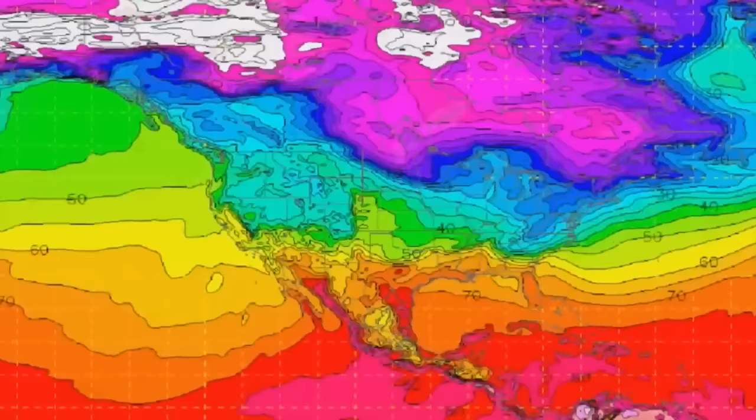In the real world, the answer to the question of can we see into the future has been answered with a resounding no. In our ever-evolving society, the trend today is to look toward the future by relying on predictive modeling to best predict the probability of an outcome. But we all know that even these well-thought-out predictions based on data often turn out to be not so predictable. Although it's clear that future events remain virtually unknowable, there is one group within NASA that comes as close as you can to seeing into the future.

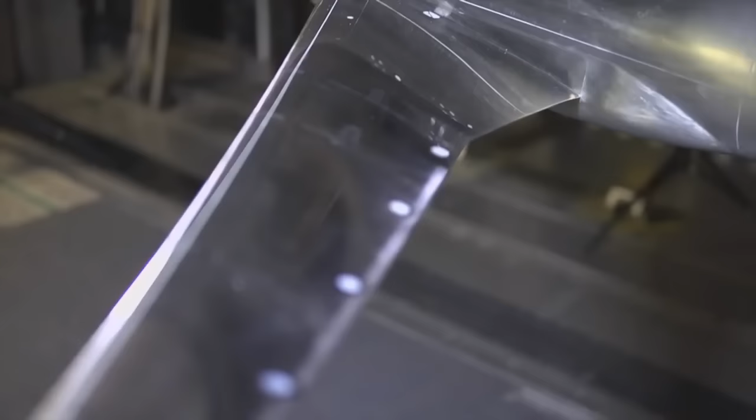Throughout NASA's field centers, members of the Fixed Wing Project team are peering into the future every day and coming up with concepts that they believe will be on the next generation of aircraft. Because it takes years to plan and develop these concepts, the hardware and theories that are being tested today will be key components that enable the next generation of aircraft to take flight.

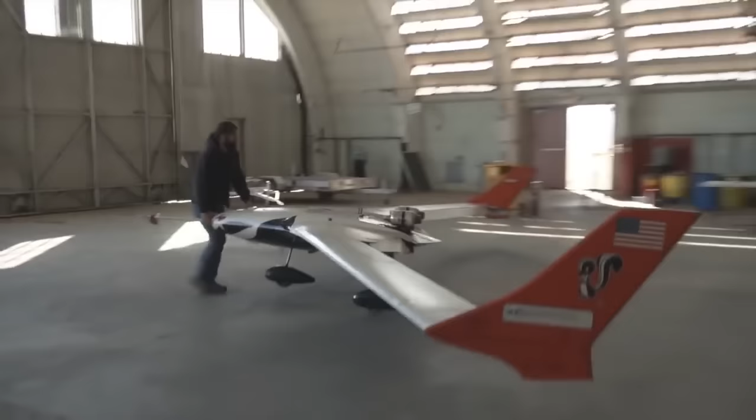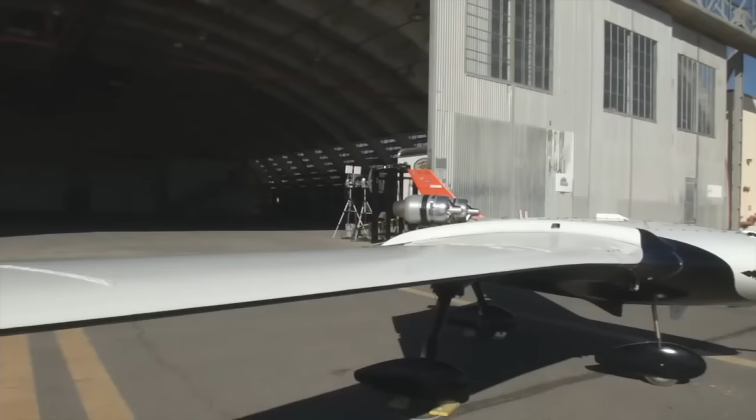On this episode of NASA X, follow us around the country as we visit members of the Fundamental Aeronautics Program's Fixed Wing Project, who are developing the framework that will shape how aircraft of the future will fly. Take a look behind the gates of NASA to see what some of these new ideas look like and how the engineers of NASA are paving the way for the ideas that will change the future of flight.

To the untrained eye, most of the aircraft of today look very similar. This is because over the past century of flight, aeronautical engineers have worked hard to optimize passenger aircraft to the point where they are as efficient and safe as possible. As a result, the basic tube and wing shape has been configured and examined from every possible angle, making it the most efficient design possible today.

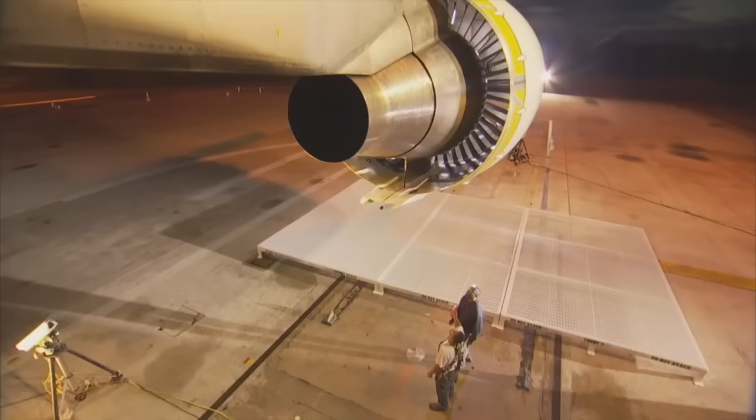Although aircraft have looked basically the same over the past few decades, if you look closely, you can see some of the major design changes. Wings that were once swept back more dramatically now are less so because of advances in aerodynamic shaping. Engines that spewed emissions by the ton are now much more efficient. Materials that were once so heavy that they significantly weighed down a craft are now much lighter and stronger.

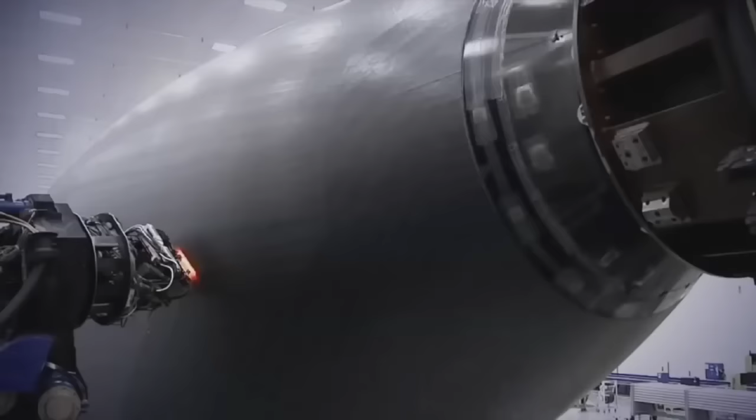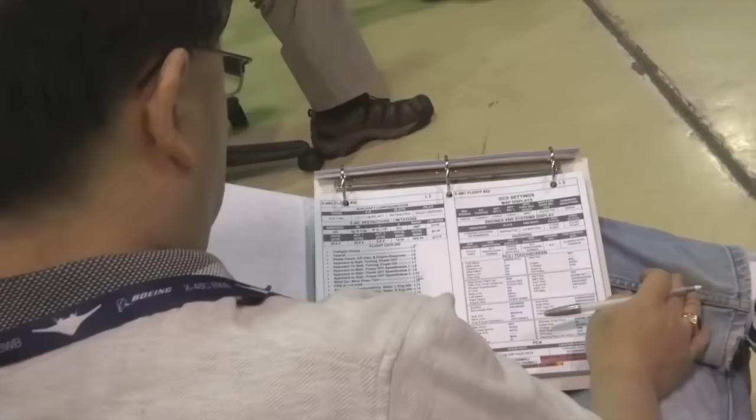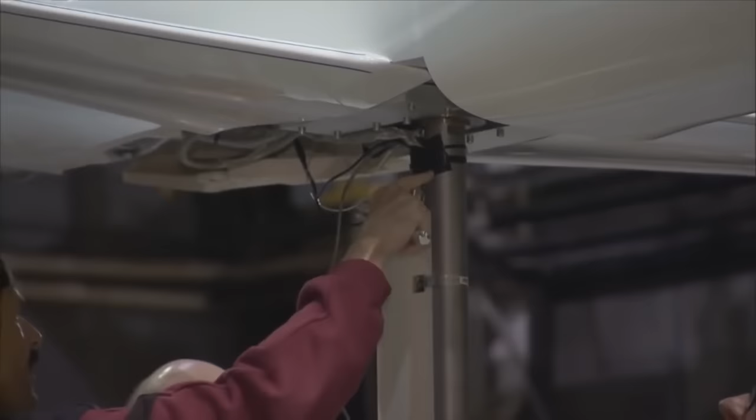With all this improvement and efficiency, it is fair to ask if there is anything else that can be done to make flight even better. The answer is of course yes. Behind the gates of NASA, there are scores of researchers who know that we can still make aircraft better because they are working toward these long-term goals every day. Some of these researchers from the Fixed Wing Project are working on so-called N+3 configurations and goals.

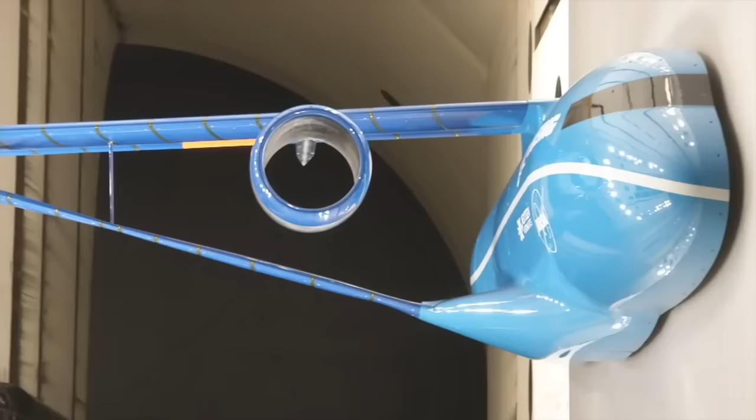In mathematical terms, the letter N is where you start now. N+1 is the next step. N+2 is just beyond that, and so on. Here in the Fixed Wing Project, N+3 equates to aircraft that will be flying in around the 2030-2035 timeframe. For this team, everything is on the table, including engines, fuels, wings, and fuselage shapes.

Well, we need to remember the first A in NASA is aeronautics. So it's a National Aeronautics and Space Administration. Aeronautics is the field of research for airplanes. The airplanes that fly today were researched and experimented with within NASA many years ago. So we're trying to continue that tradition, that important work that we have done for the nation and the world, for 20, 30 years from now.

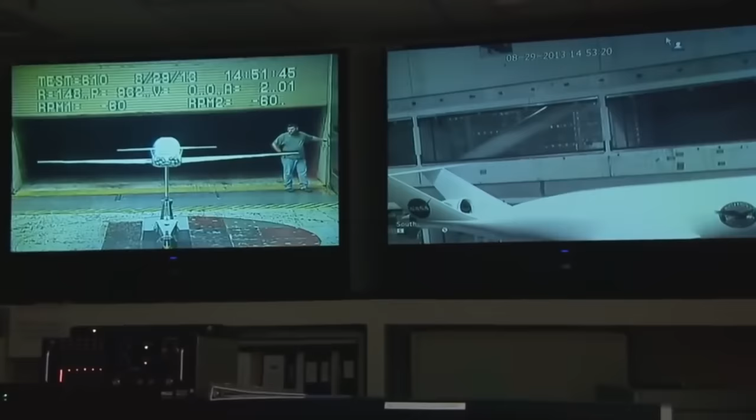Fixed Wing is a NASA research program in which we are doing activities to try to improve the airplanes that we're going to be flying in the future. We're trying to make them less noisy. We're trying to make them better for the environment. We're trying to make them in a fashion that they will use less fuel.

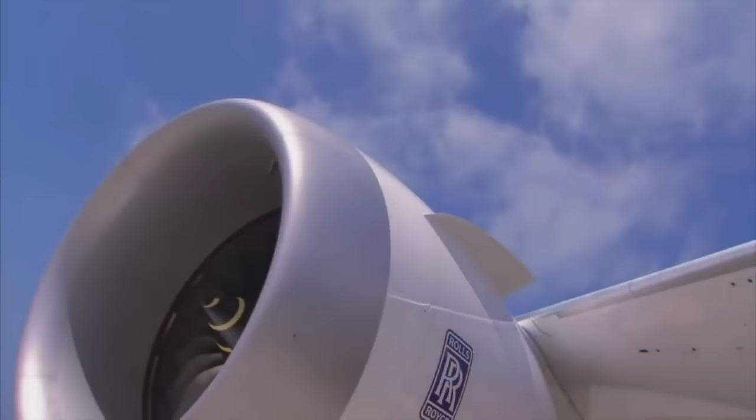The research we're doing is important because air travel is such an important part of your life. People travel, even if you don't travel. Cargo gets carried every single day. You use something every single day that gets carried by an aircraft. It's part of our way of life these days, and it often gets taken for granted. There are challenges though, so we are focused on exploring and developing technologies and concepts to improve the energy efficiency and environmental compatibility of transport aircraft.

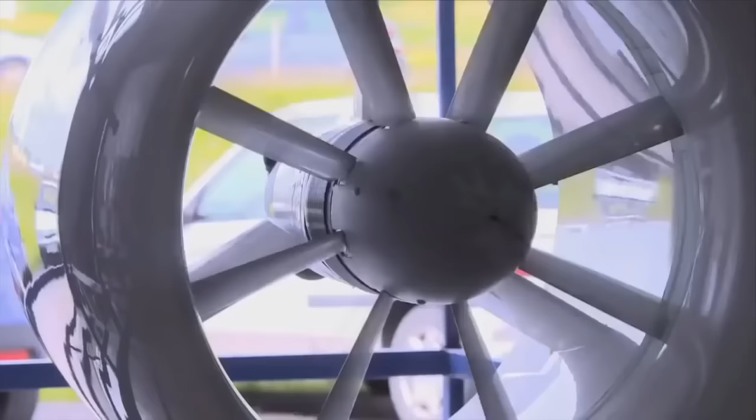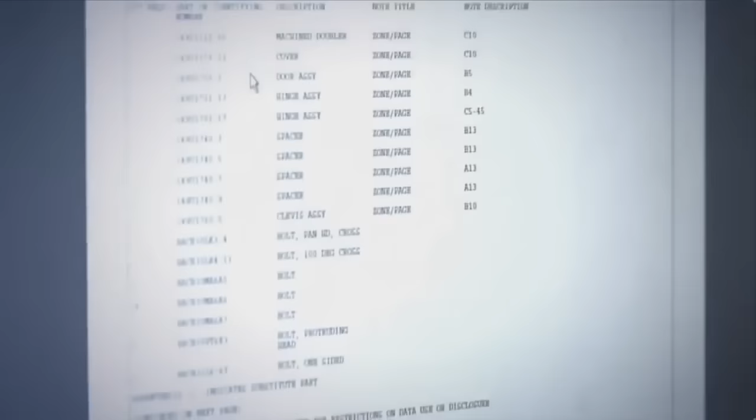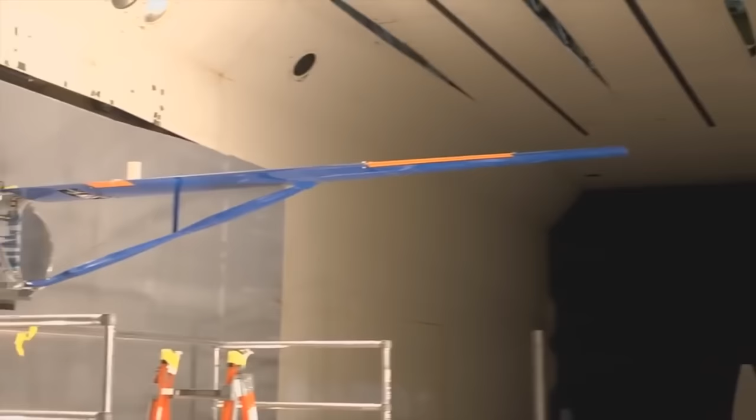With this mandate to significantly lower noise and emissions and increase performance for subsonic aircraft, there will be a need to address virtually every aspect of the current aircraft configuration, including developing new materials and engines, testing alternative fuels, and even changing the fundamental shape of the aircraft. All across the country, fixed-wing researchers are doing just that. Major advancements are being made into the understanding of how future aircraft will fly. Because there are so many areas of study, let's first look at something that has the potential to be used today as well as in the 2030 timeframe: alternative fuels.

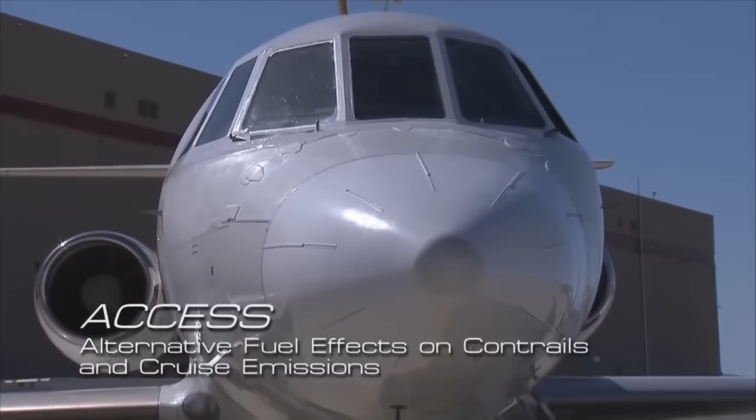On this beautiful morning at NASA Dryden in California's high desert, a test called ACCESS, or the Alternative Fuel Effects on Contrails and Cruise Emissions test, was performed to study the effects of alternate biofuel on engine performance, emissions, and aircraft-generated contrails at altitude. For this test, 2 aircraft were flown in tandem. The first is NASA's DC-8, which will be burning an alternative fuel.

The second aircraft is NASA's Falcon that will fly directly behind the DC-8 to measure and characterize the emissions coming out of the engines from the alternative fuel. Here is NASA's Bruce Anderson to explain. NASA's role is in assessing the combustion characteristics of alternative fuels, as well as determining how these fuels will affect the performance and emissions from aircraft.

To understand how aircraft affect the climate, we need to make measurements at cruise altitudes. So the focus of ACCESS, or the alternative fuel effects on contrails and cruise emissions, was to fly behind the DC-8 in flight and look at its emission and contrail characteristics as we changed from standard jet fuel to a fuel that was a blend of a fuel that was made from camelina plant oil, and also added 50% of Jet A to that.

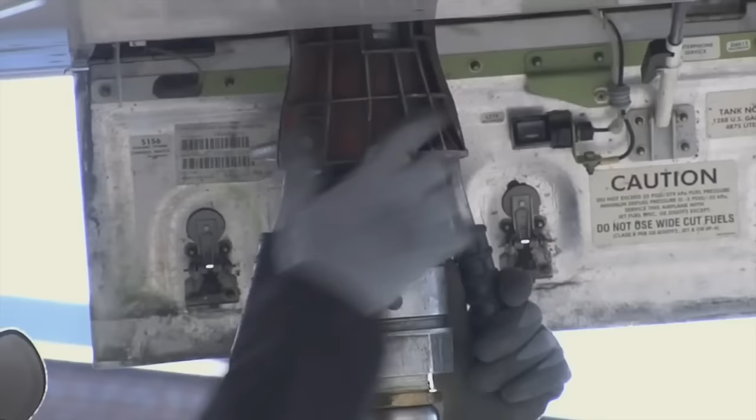The fuel also has to have similar characteristics in terms of density and volume to kerosene. So what we're looking at is drop-in fuels. A lot of the fuel systems on the aircraft are designed to rely on the aromatics in the fossil fuels to swell the seals to make them leak tight. So when we fly an alternative fuel, we have to mix it with standard fuel to retain those properties. Otherwise, the fuel would just leak out of the aircraft.

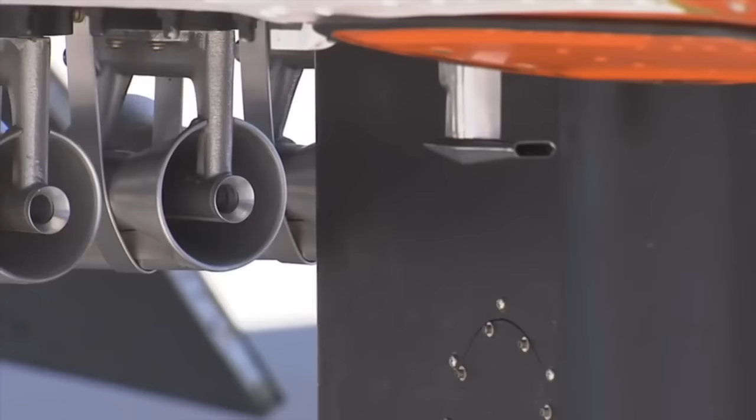And then the second thing we're looking at is just the emission characteristics. By that I mean the amount of pollutant generated per kilogram of fuel burn. After the first few flights, it was shown that using these types of alternative fuels could significantly reduce emissions at cruise altitudes, particularly soot emissions. Work continues to better understand how to use these fuels and how to make them even more efficient for future aircraft.

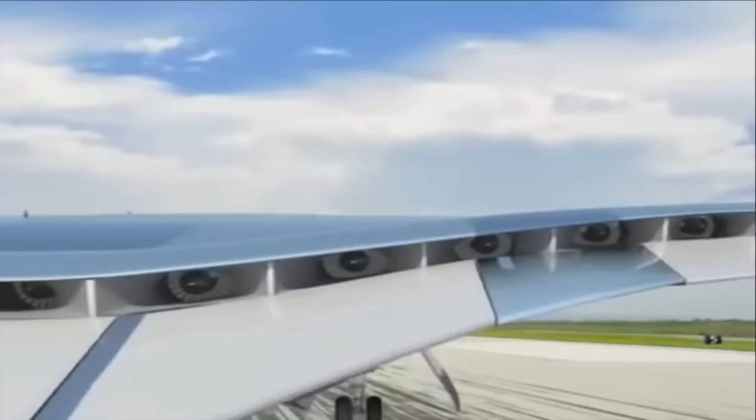Other than alternative fuels, there are some other ideas out there for finding more efficient ways to power aircraft. If we look on our roads today, many of the cars that are now being driven run on a combination of fuel and electricity. The idea that aircraft could do this seemed far-fetched only a few short years ago, but today, this idea is gaining traction. There are several ideas on how to do this, so let's take a look at a few.

Here, a team is looking over a new Boeing aircraft design called Sugar Volt. This unique design has several interesting changes, like the truss-braced wings that have the potential to reduce the drag of the wings by making them longer and thinner. Because thin, long wings have the tendency to flex more, designers have included a clever, efficient truss structure to support them. This design has the potential to reduce drag and weight, thereby making the craft more efficient to operate.

At first glance, those unique structural changes may look like the biggest game changer for this type of aircraft, but the Sugar concept holds another surprise as well. In the case of the Sugar concept, what's less obvious to the eye when you see it is that it has an unconventional propulsion system. It's a hybrid gas-electric concept that's closer to what you see in a Prius. It has batteries and a gas turbine engine technology.

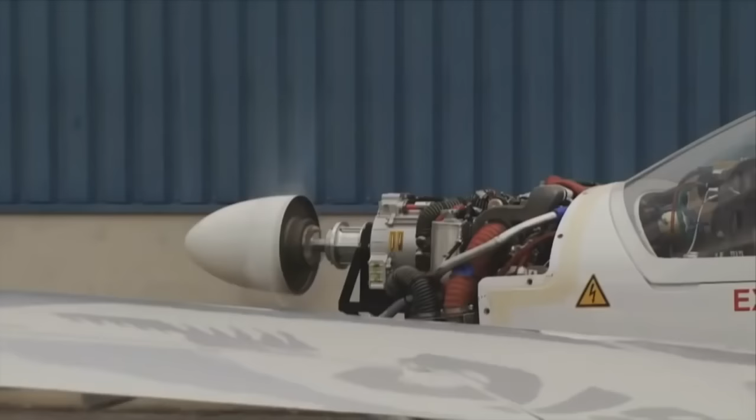It requires advances to battery technology, but those are happening throughout the world independent of the aerospace industry, and we're trying to leverage that. We do it on cars, we should be able to do it on airplanes eventually. The challenge is to take those batteries and have enough energy or power content and have them be lightweight. Where we are today, I think, is we're at the dawn of the age where we can start to see electric propulsion or hybrid electric propulsion.

And you'll see it on smaller aircraft first before you see it on the large commercial transports. But that's what we're working towards. That's good for cleanliness, it's good for noise, it's good for energy efficiency. Has its challenges. That's why we're working on it, and that's why it's not being done today.

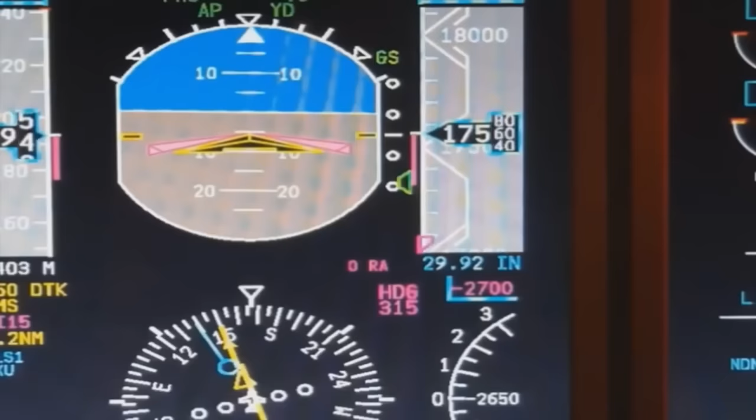The idea behind this vehicle is to have its twin engines burn fuel when great power is needed, like at takeoff. But when the craft is in a cruise configuration, a switch can be made over to a battery electric mode to supplement or even replace power to the engines. If successful, this could reduce the amount of fuel burn by up to 70%.

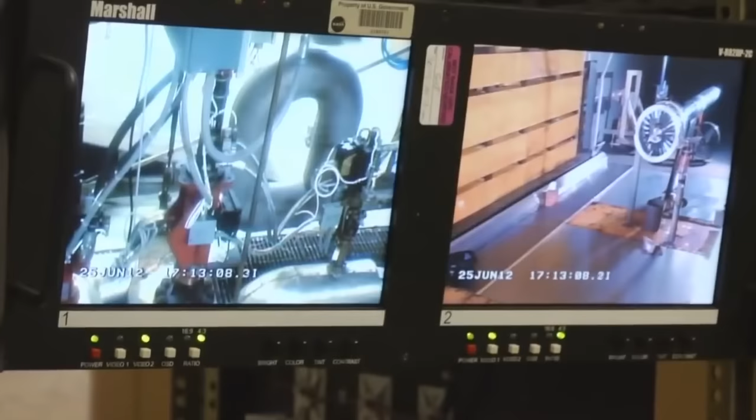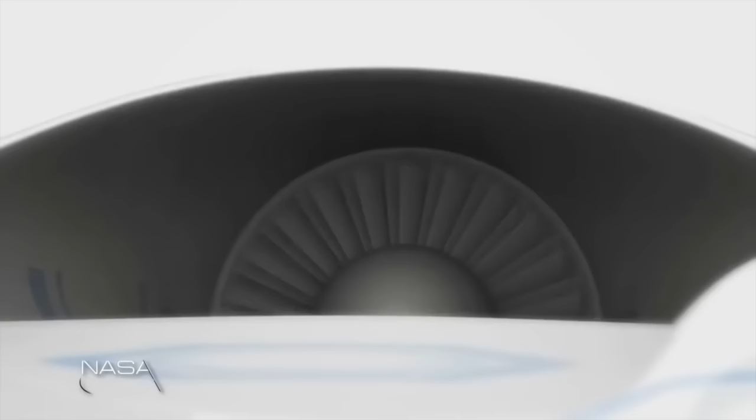Another concept called turbo-electric propulsion is being studied here at the NASA Glenn Research Center. Here is NASA's Jerry Brown to explain. There's not been electric airplanes except in very small size. And the reason is that electric motors and generators tend to be too heavy for flight. We're hoping to change that, and we're hoping to get a benefit from saving a whole lot of fuel in the process. The type of electric propulsion that we're talking about today is turbo-electric propulsion.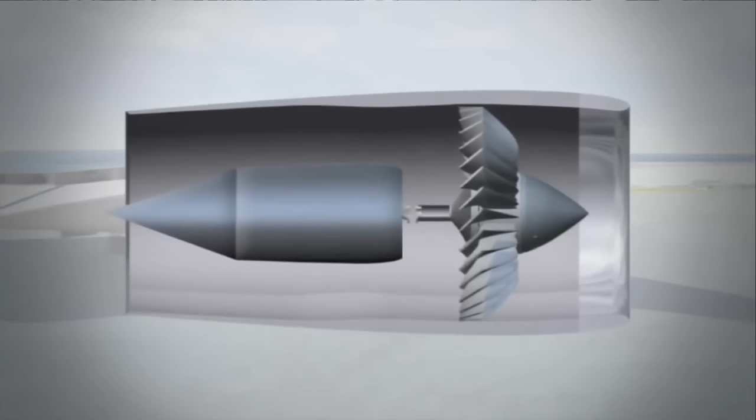We're going to keep the turbine engine because it's really good as far as a lot of power in a small power plant. And then we're going to use its power to drive a generator, send electricity to motors that drive fans that do the propulsion. This concept will look very different from vehicles of today as well. Potential designs include 2 large turbine engines on the wingtips that will drive 2 large generators inside the body. The generators will in turn power a number of fans, providing the propulsion the aircraft needs to fly.

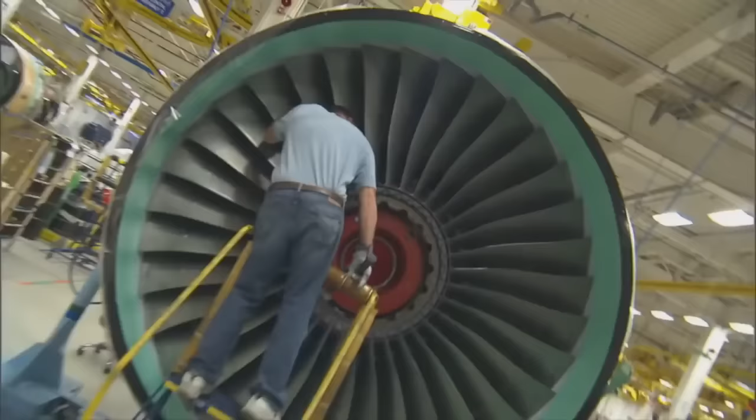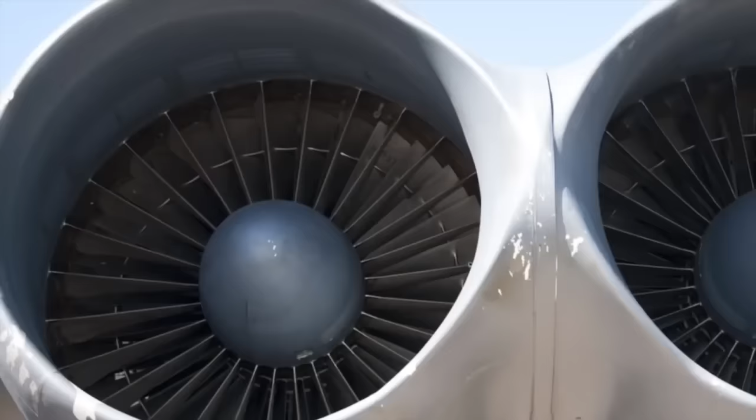What we want to do here is we want to be able to break the turbine engine from the fan, and that gives the aircraft designer a lot of freedom. If he can move the turbine engine somewhere else in the airplane, that may itself have advantages. The engine and the fans don't have to turn at the same speed. You don't even have to have the same number of fans. And that's what we're really looking for, is we want to have an array of a whole bunch of fans, maybe 15 of them, say, and just 2 engines. You like to keep just 2 big engines because the big engine is much more efficient.

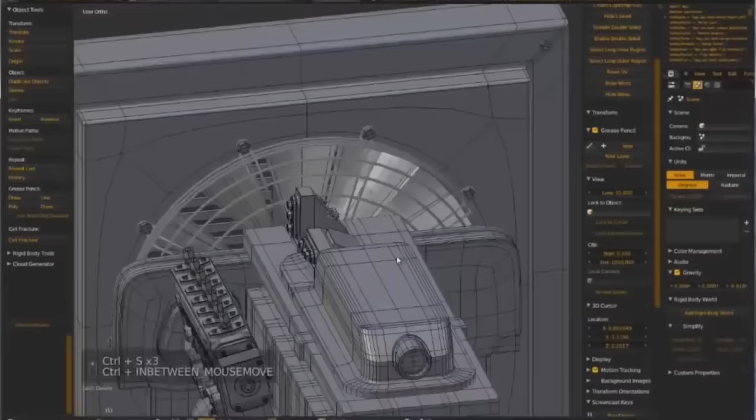This idea is intriguing, but big changes need to be made to make it viable. One major challenge is the need to reduce the size of the generators, because the generators of today are way too big to fit on an aircraft. One idea that the NASA team is looking at is a way to remove the current type of copper windings in the generator and replace it with superconducting material. This change would allow the generators to shrink, making them viable to fit on future aircraft.

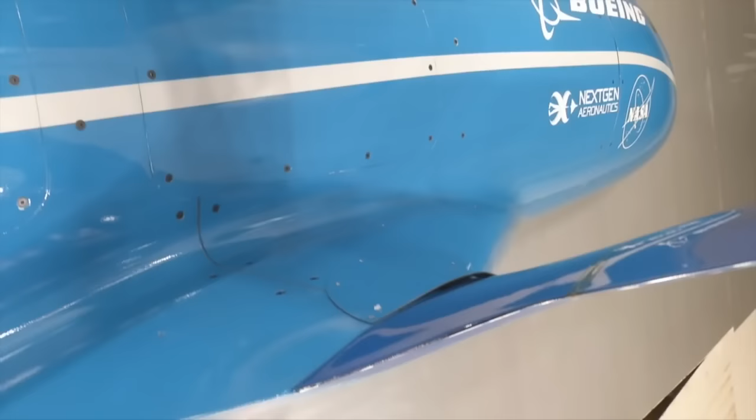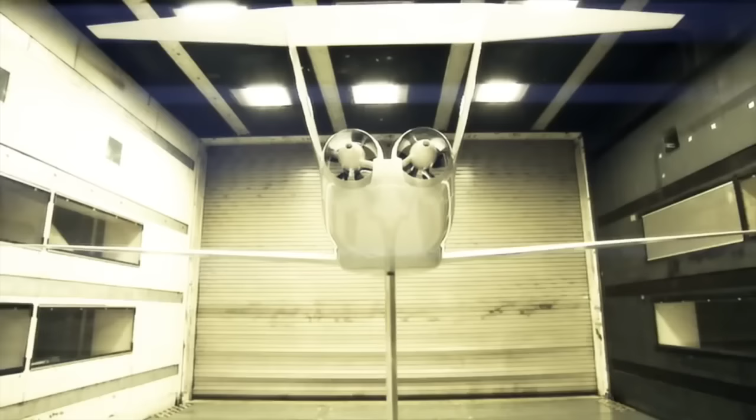As we've seen so far, new aircraft designs are coming online that have the potential to greatly improve aircraft efficiency. Another of these revolutionary designs has come out of a joint MIT and NASA study. This unique design is called the double bubble and has the potential to reduce fuel burn by up to 70% as well. So the MIT D8 double bubble design was something we've been working with MIT for a number of years on. The idea there is to take some of the lift that you would normally get from the wings and try and move that to the fuselage.

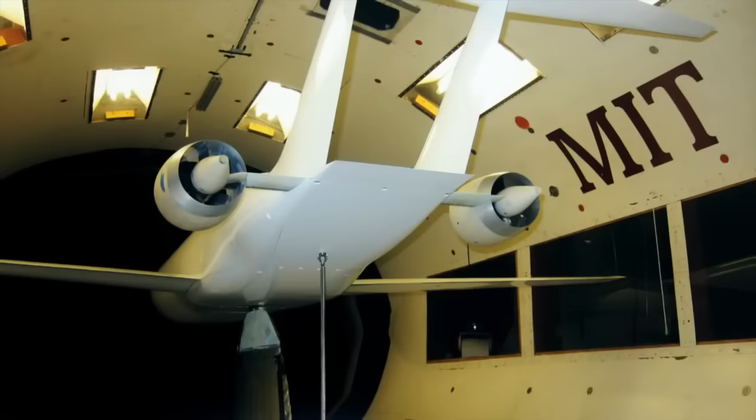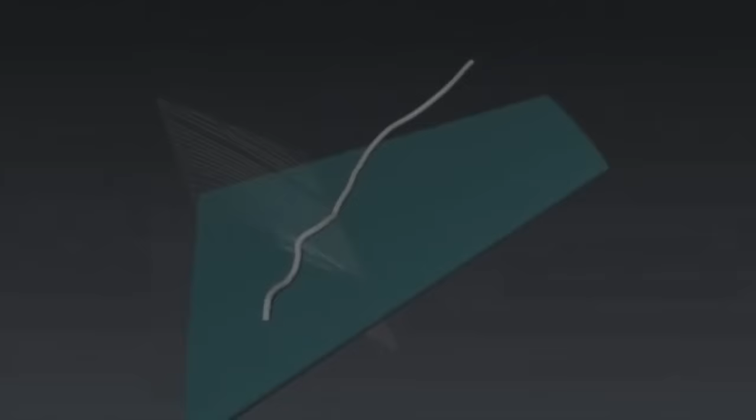It has 200,000 processors working on the problem if you use the whole machine on one problem. So it's a very large machine, and we need that very large machine because we need to do very big problems here at NASA. The Aeronautics Research Directorate that we're using it for is to try and simulate the flow over these N+3 configurations.

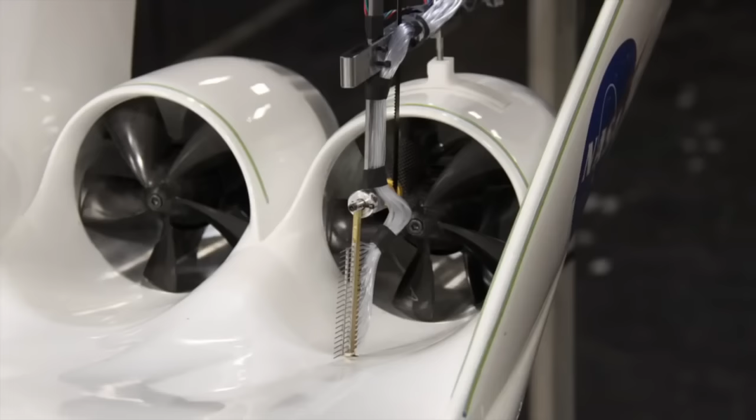So in order to capture all the detail you'd see on a vehicle like this, including what's going on inside the combustors of the engines and things like that, you need to have a lot of grid points to resolve all the fluid motion inside those engines, over the airplane, and having that many grid points to resolve all that physics in 3 dimensions creates very large computational grids that require very big machines to advance the equations that govern the fluid motion and get these CFD, computational fluid dynamics solutions that we use to make our assessments.

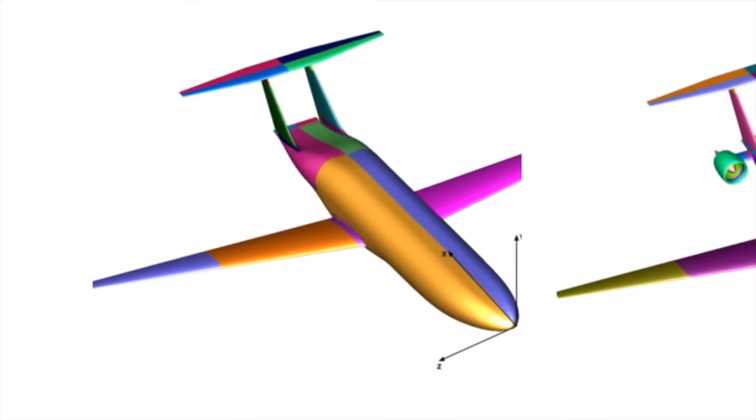Aerodynamicists of today are able to model ideas on computers, which allows them to test many different configurations before a wind tunnel model is ever built. Once a design is agreed upon, a wind tunnel model can then be fabricated and tested. This process was used for the double bubble as well, but the wind tunnel test showed surprising results.

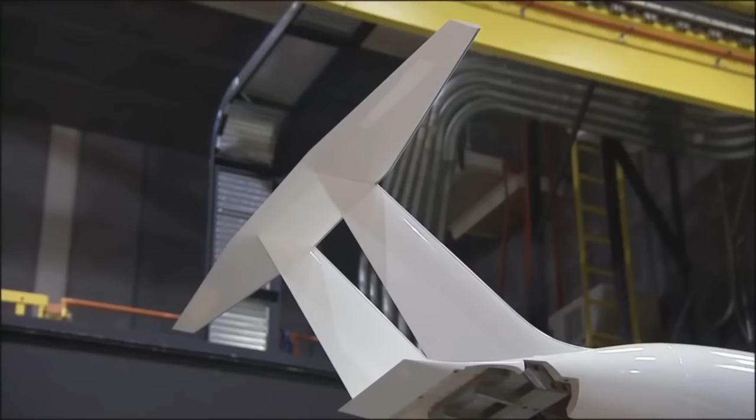The good news is that we've just completed the first test of this configuration in the Langley 14x22 wind tunnel at NASA Langley, and it showed even a greater reduction or a more fuel efficiency benefit to this technology than we had predicted on paper with our low-order models. So we're trying to digest the experimental data that show this nice benefit in fuel efficiency from this configuration.

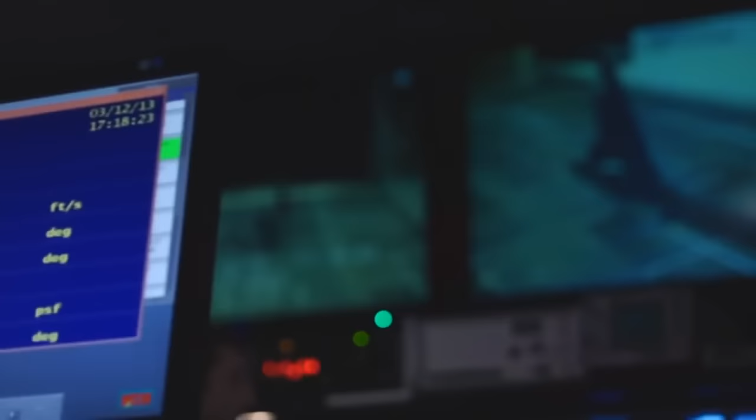At the same time, we're also using the supercomputer here at NASA Ames, the Pleiades supercomputer, to do computational fluid dynamics CFD runs of these same configurations and see if we can confirm that benefit on the computational side as well. Testing will continue on the double bubble, and if the results hold, you may see this type of aircraft at an airport near you in the future.

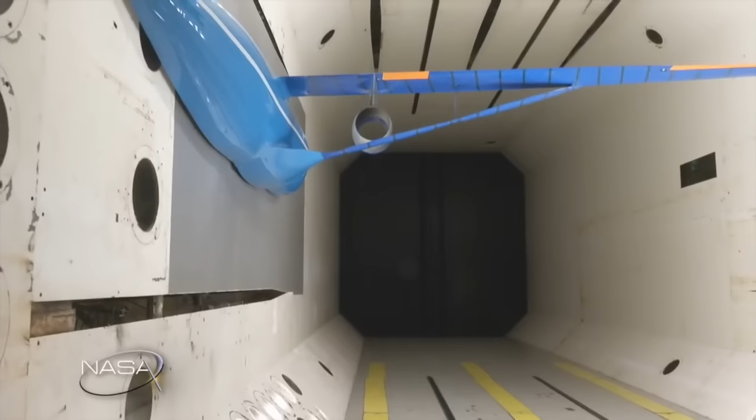When testing aircraft, many different stages occur. We have already mentioned CFD and wind tunnel testing, but another tool in testing future designs is to build a flying scale model. Although CFD and wind tunnel modeling is the mainstay, often test flights of these small, scaled-down versions of an aircraft offer some of the most dramatic results for researchers. That is the case with this aircraft, called the X-56.

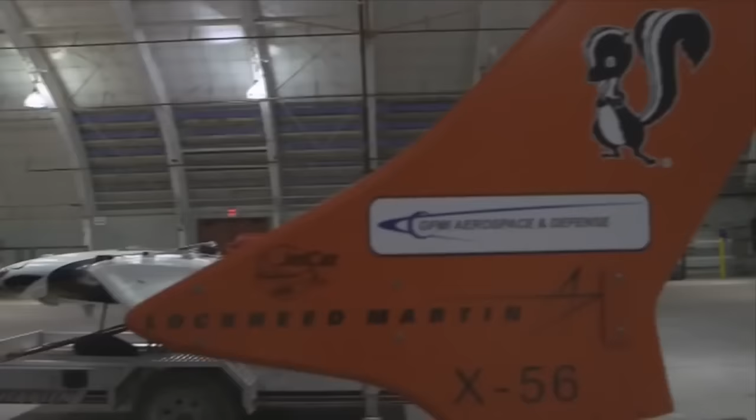This aircraft is being used as a test bed to understand how different wing configurations work and how a unique idea called active control may be used in the future. The whole concept behind the X-56 is that they've long known that a very long wingspan vehicle is more efficient than short wingspan vehicles.

Problem is though, when you get a very long wingspan, you start to get into issues with flutter modes that start to creep into the vehicle, so that the wing will go unstable and in extreme cases will rip off the vehicle. To get around that problem, you can use active flight controls to suppress those flutter modes.

Active control is you put things like accelerometers within the wing, and as soon as you sense that the wing is starting to get into these flutter modes, you use the control surfaces behind the wing to damp that out. So the airplane, as it's flying, is continually fighting these modes and keeping the wing straight and stiff. Then you can build a lighter, longer wingspan vehicle that is more efficient.

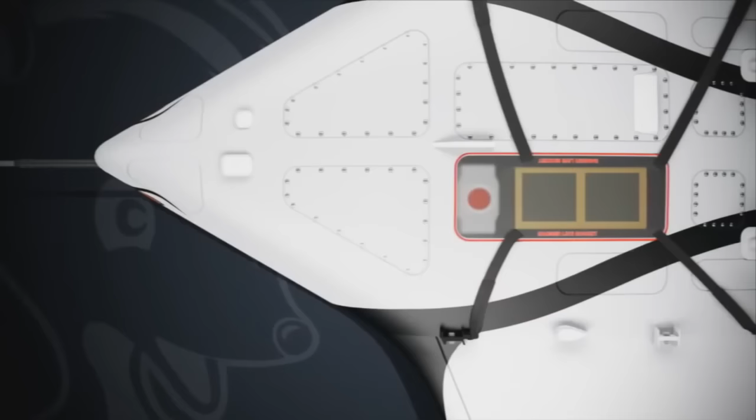This vehicle, as funded by the Air Force, was built as a multi-utility technology test bed. They call it the MUTT for short, and it is built to do a lot of different kinds of testing in aeronautics. The wings are removable. You can put on a stiff wing, you can put on a flex wing, you could do a joined wing configuration. We can learn quite a bit from testing this kind of vehicle.

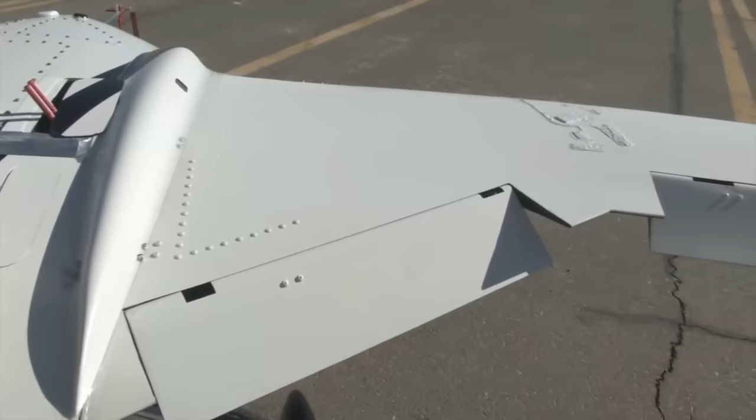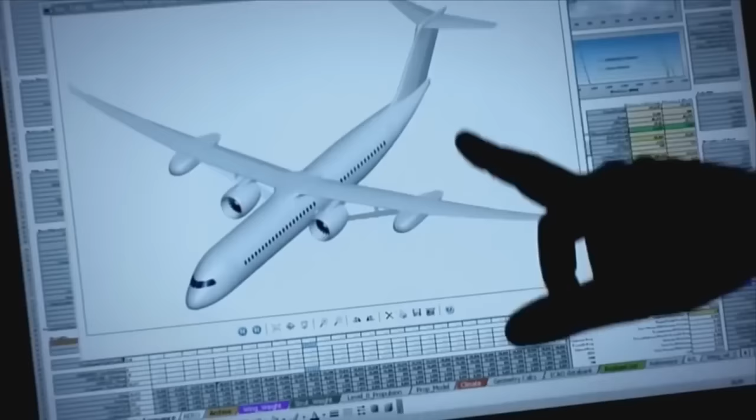Right now the focus is on flexible wing and active control of flexible wings, but in the future there are many experiments that can be done with this vehicle. The research on the control of lightweight, flexible wings being performed today on the X-56 is key to enabling the long, thin, low-drag, and low-weight wings of tomorrow's N+3 configurations.

Much is going into understanding what it will take to improve the already incredibly efficient aircraft of today into ultra-efficient vehicles of the future. Although we don't have all the answers yet, it's clear that NASA and its brilliant engineers and researchers are helping to lead the way to a safer and more efficient way to travel.

We are nowhere near the maximum that we can get out of this industry. And there is a lot of work to do, and that's what my team is doing. That's what we're doing within NASA, and I cannot wait for the future.